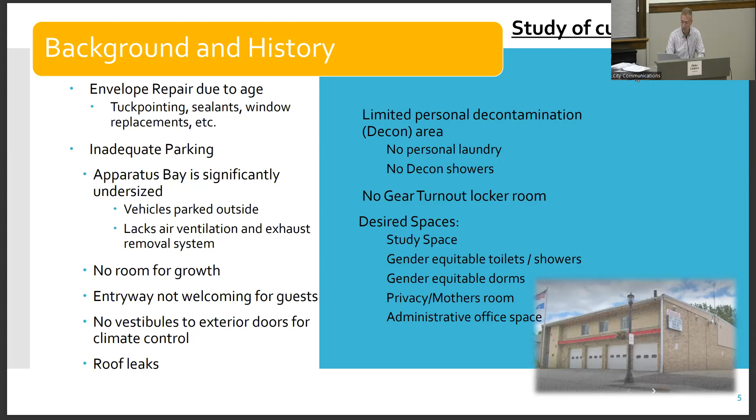We also identified that we would like to see different spaces, like a study space, gender equitable toilets and showers, gender equitable dorms, privacy mother rooms, as well as administrative spaces. In that study, we also identified some non-compliance issues, like ADA compliance.

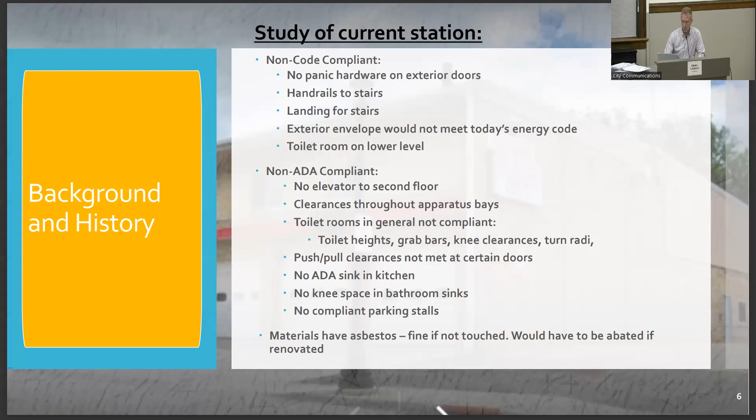We also identified that we do have asbestos. In the places that it's at, it's fine if we don't touch it. But if we do any renovations or maneuvering around it, we have to have an abatement plan in place.

So overall, what we assessed on our 60-year-old station is that the positives are that it was in a good location compared to our fire district and where our responses and volunteers were. It has a meeting room, which is nice, as well as museum space.

The negatives came to light with safety, lacking modern safety features and space for best practice. The apparatus floor is small, along with cleaning and decon, office space, turnout gear, public entrance and parking, as well as overnight accommodations. Overall, the study led to a recommendation to begin assessing a possible new facility.

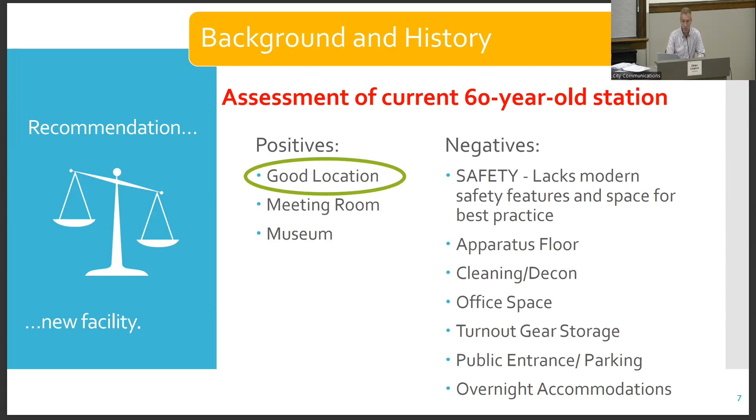As we talked about with the location, the study also showed us a mapping of where our volunteer responders are in relationship to the station. You'll see little orange dots on there that indicate where the home residences are of our volunteers responding to calls.

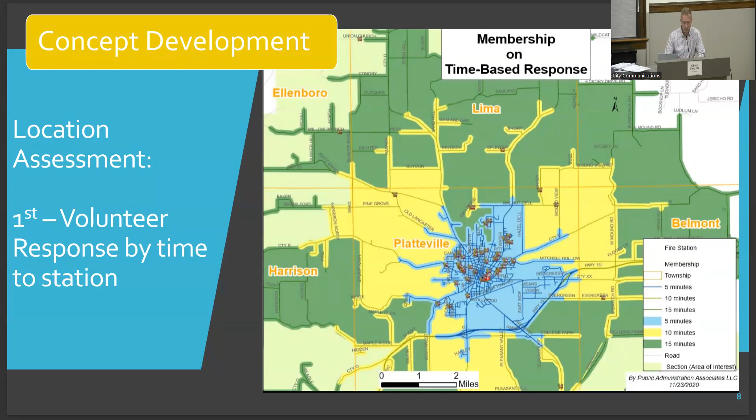Everything in the blue section is about a 5-minute response. Out into the yellow sections, you're at a 10 minute response. And out into the green is a 15-minute response for our volunteers reporting into the station.

A study was also done on the mileage out from the station at its current location. The green is a 1.5 mile response out, and the pink is a 5 mile response out, and everything beyond that is beyond a 5 mile road distance.

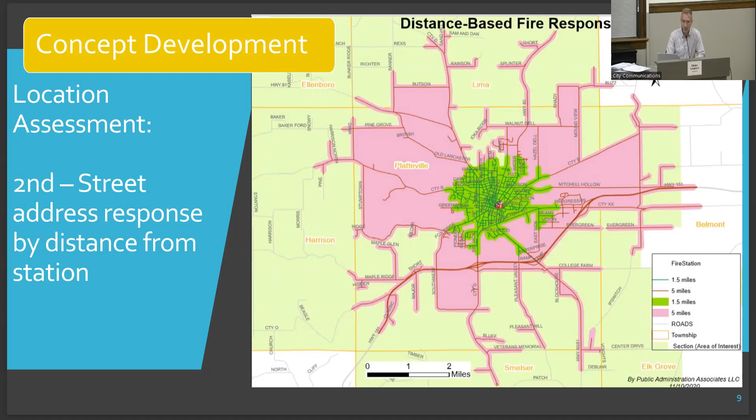Later into the project, we also started asking the question, as we considered placement of the fire station, where are our responses at? A recent plot graph was put together through our partners, the Southwest Regional Planning Commission, who does our GIS work. The Chief sent them the addresses of our responses in 2022 to put on an overlay map.

This is kind of an expanded area, probably beyond our fire district itself, capturing mutual aid responses. You'll see all the little black dots there show where our firefighters reported to calls, not necessarily fires, but responses.

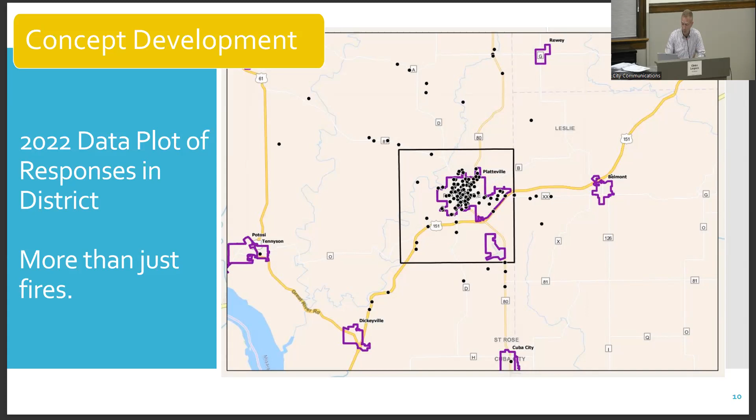The next map narrows in onto the city center, mapping where a majority of the responses were. This map gets very tiny, but the legend in the bottom right shows the different types of responses with color-coordinated circles. Fire is yellow and gas leak is green, but it's all very tiny because some responses were all condensed in a very tight spot.

The GIS map overlay work also put cigarette burns to show the volume and concentration of responses. You'll see some spots flared out to yellow, indicating a volume or concentration, not like a massive fire that happened on the east end of town. It's just showing the concentration of our spots, correlating with where people are at in the district.

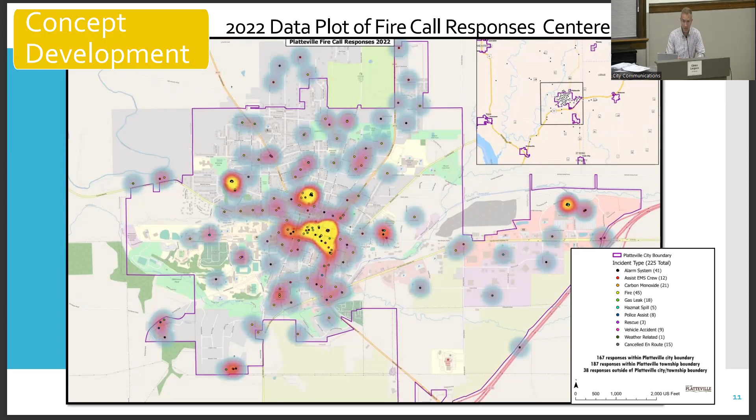With all this data and the availability of space that the city had at the time of the study, we evaluated three main areas. We evaluated the existing site on East Main and quickly arrived at the conclusion that it's too small. The 6 bays needed for the current apparatuses does not fit on the existing parcel.

We then looked at the Armory facility on Water Street, and again it arrived at this being too small as well.

It would need a 3-story solution, and it has challenges with parking as well as stormwater that runs through that area. And then concerns with site safety and where responder parking would have to be in relationship to where the bays and other elements are.

And then the space between Adams and Lewis Street, the O.E. Gray school site, was also evaluated. This kind of proved to be the most opportunity out of those 3 sites. It has room for growth, but it was also identified as having to account for some slope in that area as the contour runs downhill from the front side of Adams to the north side of Lewis.

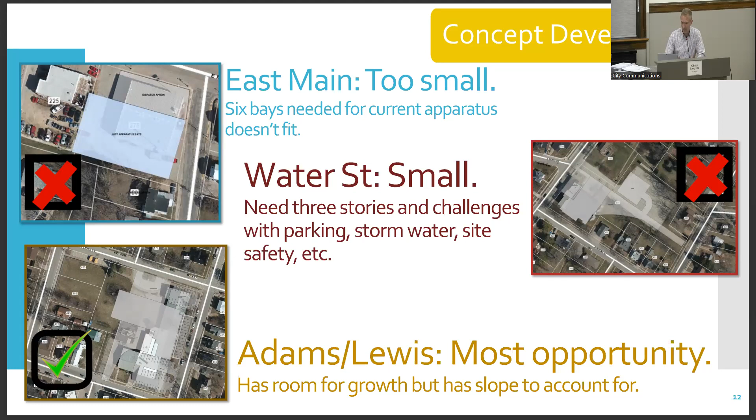With this kind of an assessment and this data coming back, the city decided to move forward and begin design, and we brought in Wendel Five Bugles to kick off a project and follow a timeline that roughly followed this, getting extended a little bit. The end of that kind of pushed into, I believe, like April-ish of 2023, but in hitting these benchmarks.

While we were evaluating the different opportunities on the O.E. Gray, one of the first opportunities evaluated was a renovation of the existing school there. So the concept was brought forward of, can we reconfigure that, put a bay on it, and make it a fire station? Through that exercise, we realized that the school is in fact not meant to be an emergency response building. There was a lot of space, but the space wasn't necessarily in the right spots. Using the hallway configurations existing there also proved a challenge for operational purposes. And so the overall assessment is that it would require significant demolition and reconstruction, and kind of having an etch-a-sketch on O.E. Gray was seen as most preferable.

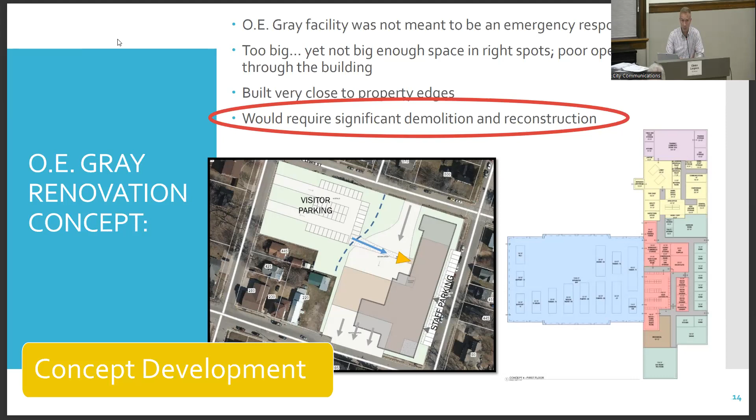Then a series of multiple different models were explored with a 2-story type of a design concept. They looked initially at trying to capture some of the topography, having a ground level entrance off of a basement floor and a ground level entrance off of Adams Street, and looked at different places to position it on the parcel. There were multiple models explored in trying to arrive at a solution on O.E. Gray.

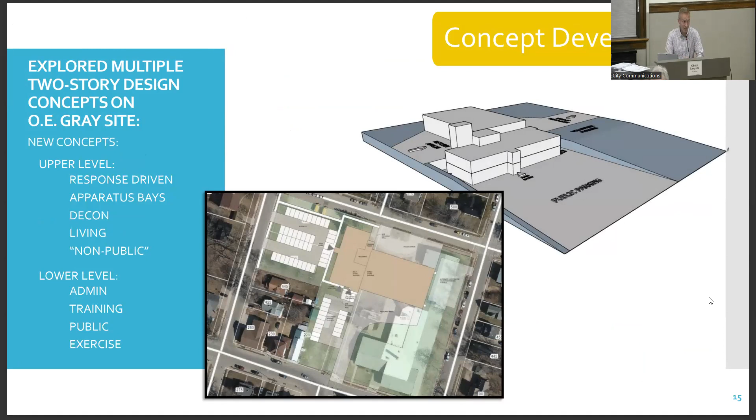At the same time, through the efforts of some amazing folks here at the city and with support from our state and federal legislators and all kinds of folks that helped us with this, as well as partners in town writing letters of support, we were given notification of an appropriation of federal congressionally directed funds of $7 million.

And then we also brought in a construction manager, arriving through a bid process through our RFP process, arriving at Kraemer Brothers. In bringing in the construction manager, we had a little bit clearer vision of what some of the civil work was going to be in order to accomplish the project. So we had a clearer understanding of the engineer, as well as some of the material costs and inflations.

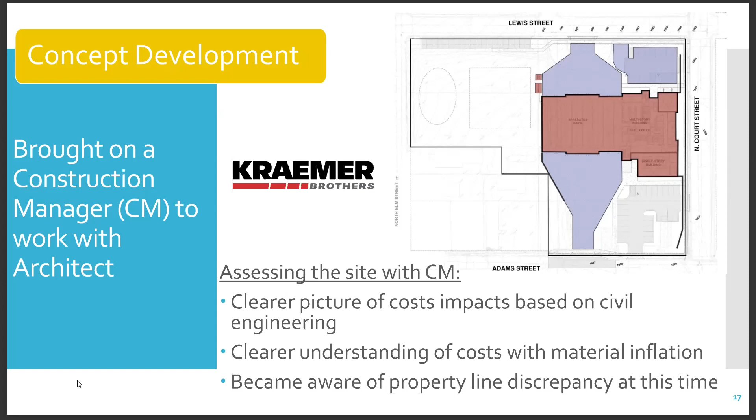And then at this time, we also became aware of a property line discrepancy as we surveyed the plot. How that impacted was, if you're familiar with the driveway that goes into O.E. Gray, the fence on that driveway on the west side is edged over and actually encroaches into the existing parcel, because the original alleyway is only on the east side of what is Highway 81 there. So we became aware of that small change in expectations, if you will.

As many of you were here on the evening of April 20th, we had our schematic design presentation, or our concept design presentation, brought forward from Wendel Five Bugles and then also the Kraemer Brothers. The solution fit on the build site. It offered 7 drive-through bays, decontamination, admin offices, a 60-person training room, storage, kitchen, EOC space, and future expansion for dormitories, essentially a second floor that was shelled.

It came at a cost of what was estimated at $15,467,000 based on square footage. And it also had several different features or alternate bids that could be included into it or reduced from it.

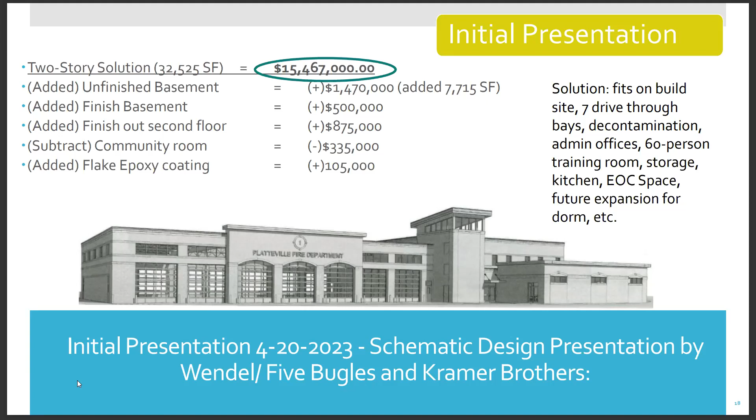In taking that design and talking with our folks here on the city end, we asked them to slim down that 2-story schematic to get to a price point down about $3 million, bringing it from a 15.4 down to a 12.5.

That was based on the assumption of knowing that we had $7 million in appropriations. That put an obligation on the city of borrowing approximately $3 million. It put our town's partners in an obligation of borrowing approximately $1 million. And then that also left about 1.5 million that, in dealing with our fundraising partners, they felt they could potentially raise that much in funds here with local support.

In our efforts of doing that, how this was all slimmed down was really based on square footage reductions to fit a price point. So all the different features and functions of those rooms, the gear room, the PPE lockers, watch room, et cetera, was all condensed down again to meet a price point.

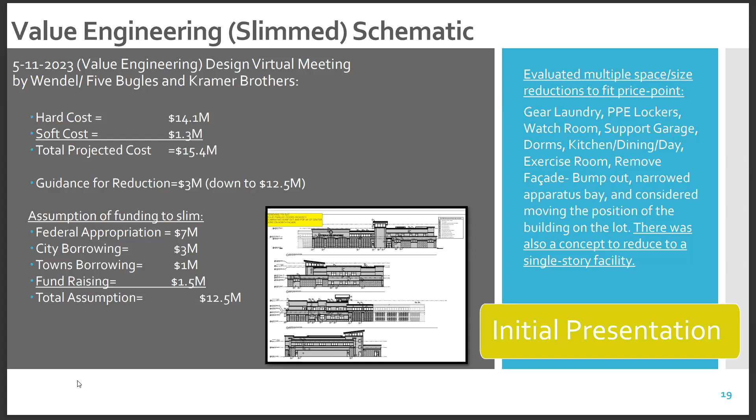There's concerns on how much functionality we're going to be losing if we compress those spaces that small. At this time it was also brought up, is there a way to reduce additional costs, try to save some of those features and the size of those rooms by bringing it down into one story? So not quite a backup and restart, but more of a set of, okay, let's try to figure this out.

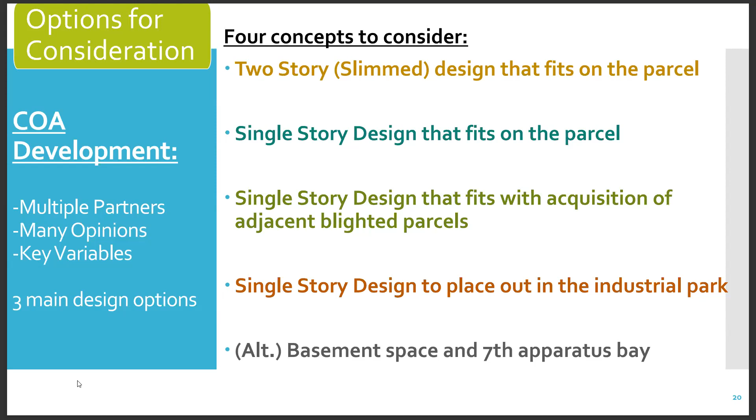So in very broad strokes now, you're looking at the first option. This is the first option of considerations that yourselves and your partners are going to have to decide on: the 2-story slim design that fits on the parcels.

On a broad assessment of this parcel, you're looking at improvement of bay space in comparison to the existing facilities. It fits on the OE Gray site. There's an egress out onto Adams Street. It's east of the corner on Highway 81.

It doesn't allow for future occupancy without added money, because this design and the price point essentially has the 2nd floor shelled and unfinished. So we don't have dormitories for overnight or long stays, or facilitating full-time responders. The multiple story also includes the need for an elevator and stairwell costs to be in compliance with a public building, and the spaces have been slimmed to meet a cost point.

Again, the functionality impacts probably have been underappreciated in terms of what those rooms are going to look like being compressed. We're also potentially having some storage room impacts because it is getting slimmed down. And again, the 2nd floor is not built out.

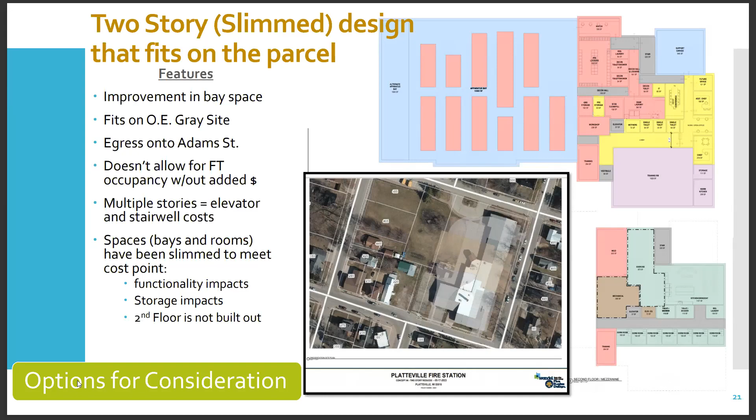So putting this in a realm of kind of teeing up for a matrix decision, the overall space of this design is at 26.5 thousand square feet, reaching about 83.2% of the assessed need of 31,900 that we had at the onset of this study.

The response to this facility is optimal, as it's still located in the center of our volunteer response, in the center of where we're seeing most of our fire district responses. Egress is onto Adams Street. The growth opportunity is limited, but there's some opportunity for growth with consideration for the slopes and the initial placement of where it goes onto that parcel.

So overall, the pros are it fits on the parcel, it has improved circulation over the existing facility for movement throughout the building, and good separation between public and private space that allows for public parking and entry off of Adams Street. There's multiple levels, requiring an elevator and stairs, which is seen as a con because that's going to incur more costs.

We have some lost storage space in consideration for our existing building, and again the reduced rooms have potential for some significant impacts on functions. And the 2nd floor with this price point is not built out.

So the cost, the base bid on this is $12,482,145. And again, this is 12 million — I'm sorry, 12 million, yes, 12 million.

Thank you. It's made out of more than cardboard. So yes.

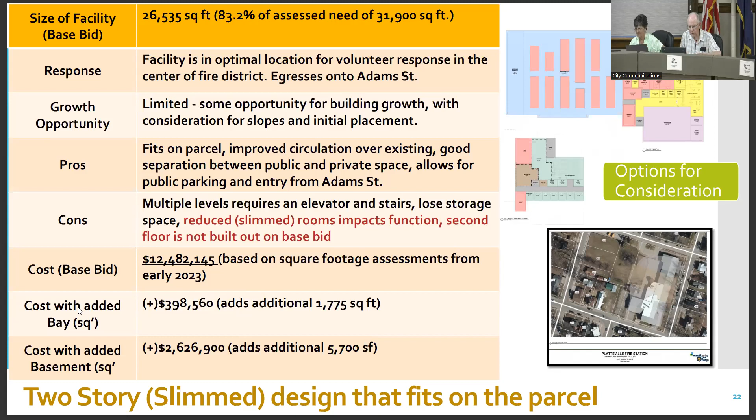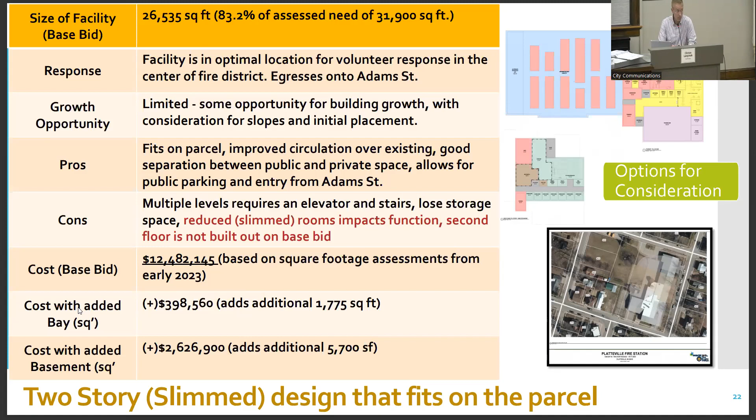So there are 4 concepts. We've just heard concept number 1, the 2-story. Now we're going to go to concept number 2, which is a single story design that fits on the parcel. Again, this fits on the parcel. Some of the features, broadly - advance your slide, please. Thank you, okay, there we go.

But again, if this is a single story, is there also a basement, or are you not talking about that? No, that's an added feature that can be in addition to all 4 of these options tonight. You can put a basement under it. It costs about $2.5 million.

So you're going single story, 1, 2, 3, and you can put a basement underneath, so that's another floor. Yes, essentially a basement would be an underground, lower level, extra floor. Correct. It's not included in any of the base bids, it's an alternate on all of them. Okay, I just want to be clear what you're talking about.

So in broad strokes, the features of this one: it fits on the parcel, it has egress out of the bays onto Adams Street like the previous option, and it allows for future full-time occupancy. In pulling the second floor down, it was thought that it would add cost, but let's see what it looks like to build out those dormitories to allow for potential full-time responder occupancy. The thing is, with the single story design, it has no elevator.

So that is a reduction in costs. But you can see that this one snugs up very much against Court Street, and there is no off-street public parking. We do have some off-street responder parking coming off of Lewis Street in the concept design right now, but there is no public parking. It would have to be along Court, Adams, and adjoining streets.

Putting this on a matrix, this one's a little bit bigger now. You're at 29,164 square feet, which gets you to approximately 91.4% of the assessed need. The facility is an optimal location for volunteer responses in the center of the fire district. Egress is onto Adams Street. Growth opportunity is limited - growth may likely be an outbuilding or modification to responder parking with consideration for the slope.

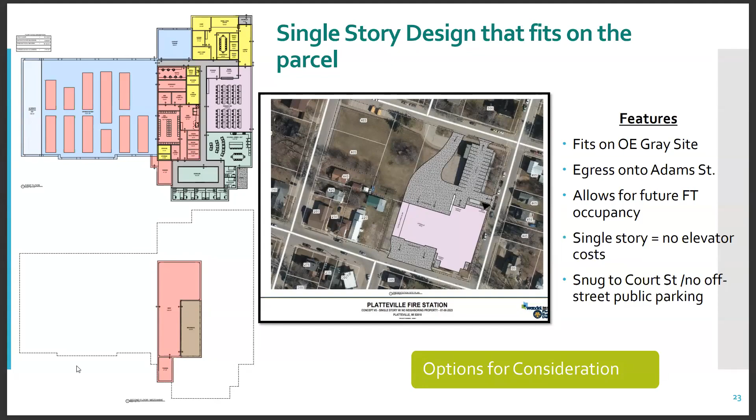I think it's important to point out that, in order to reduce costs on civil engineering work, the building is brought up to the south side of this parcel where there's less slope. If we went back and tried different angled driveways, it would result in more retention walls and things of that nature. So in trying to reduce cost, it's edged up on the south side of the parcel. The pro is that it does fit on the parcel.

The admin is connected to the garage and the watch room, which is seen as a bonus. It does not require an elevator or added stairs in comparison to the previous option. The cons are that the public parking and entry is less than optimal - you're again not going to have off-street parking. The seventh apparatus bay may not fit in this option because the parcel lines on the east with adjacent properties are very, very snug. Once civil engineering is actually done, rather than just dropping a concept picture on there, and it's actually surveyed and scoped out, it may not fit that seventh bay.

The cost of this one comes at $13,391,071. The added bay is the same cost based on the square footage, as well as the basement.

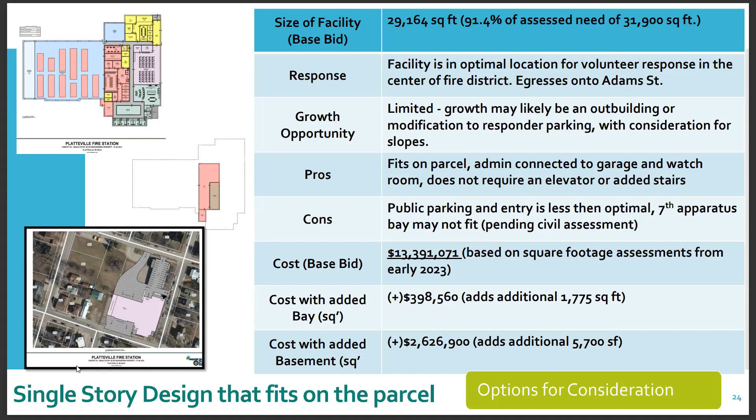There would be egress sliding into the west, so egress out of those bays would be visualized as coming out right onto Highway 81, which is seen as a safety and response improvement compared to the previous two. You'll have more visibility of responders coming out in trucks. It allows for future full-time occupancy, since this price point is built with the dormitories built out.

The growth opportunity is limited. Growth may likely be an outbuilding or modification to a responder parking lot, with consideration for slopes. The pros are safer egress and visibility on Highway 81 compared to the previous two, anticipated space for a seventh bay pending civil work, and room for off-street parking. Like the previous design, the admin is connected to the watchroom and support garage. There's additional storage space, living quarters built out, and the best operational flow compared to the previous one story.

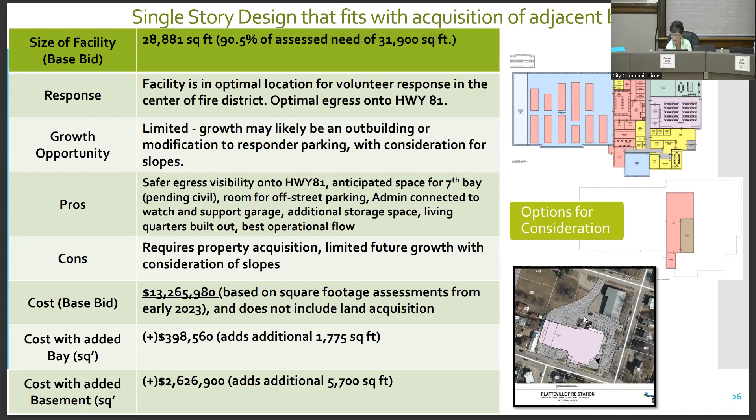The light green, kind of a faded color at the far left, that's the potential seventh bay, yes, on the top schematic there. It's showing your apparatus bay with the fire trucks in there, and the rectangle on the far left is the seventh bay added.

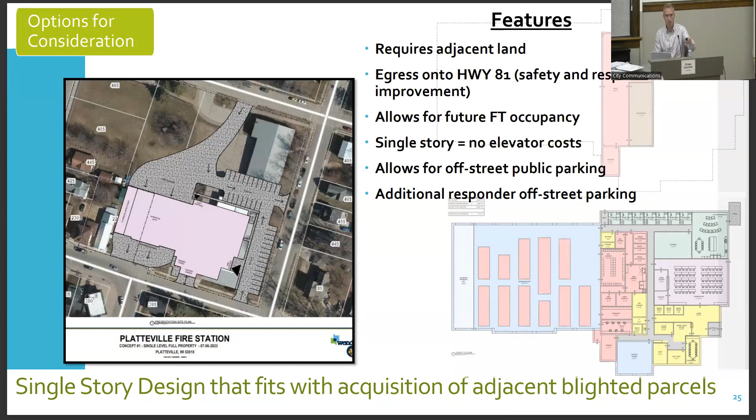That is correct. Question for Chief Simmons: how essential is the seventh bay? Because I know some of these might not be able to happen. Six bays is basically space for everything in our apparatus now, with more space in between them, not necessarily loaded by operational functionality, but again, to organize them to fit into those spaces.

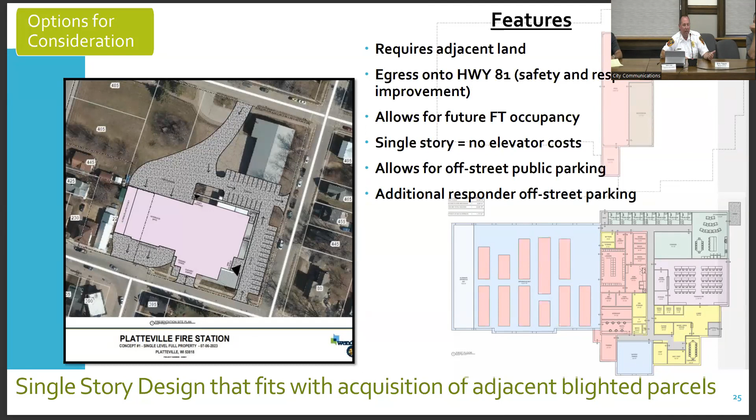The seventh bay allows a space where we can have apparatus if it's being serviced, because they are stacked. If we're working on one and can't get the one out behind it, it becomes a problem. So it allows us to have a space to either service one or adjust the operational flow so that we don't have to move an apparatus to get the one out behind it that we need. Just because they're pull-through doesn't necessarily mean that with six bays, we can fully stack everything the way it needs to operationally respond.

So it allows you for all that future expansion. And at $400,000, you'll never build that space for $400,000 again. That space becomes more and more expensive and maybe not possible in the future. Sounds pretty essential. Yeah. Thanks.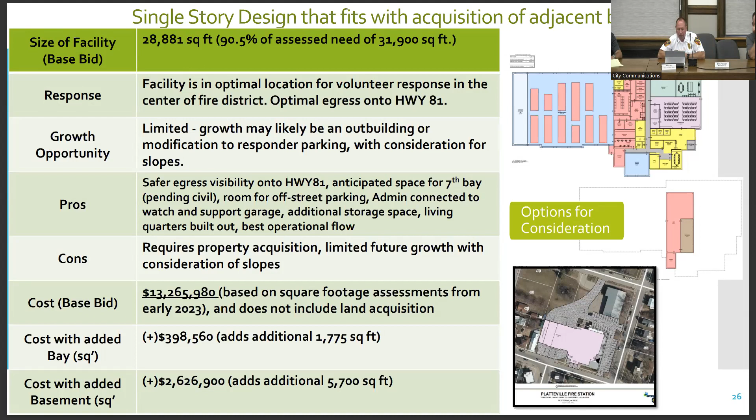The main difference then is, of course, you retain the same single story design, so there's no elevator cost. Out in the industrial park, though, you're going to have certainly more space to grow if the building has to expand east, north, or south, depending on how far from the road it is, you're going to have optimal space. The downside, most obviously, becomes the longer response distance and time for responders.

Both volunteers coming to the facility and, following the data we have, responding back out to calls. The other downside to consider is that it will utilize development district space. We are trying to promote growth out there, and that is less taxable space available.

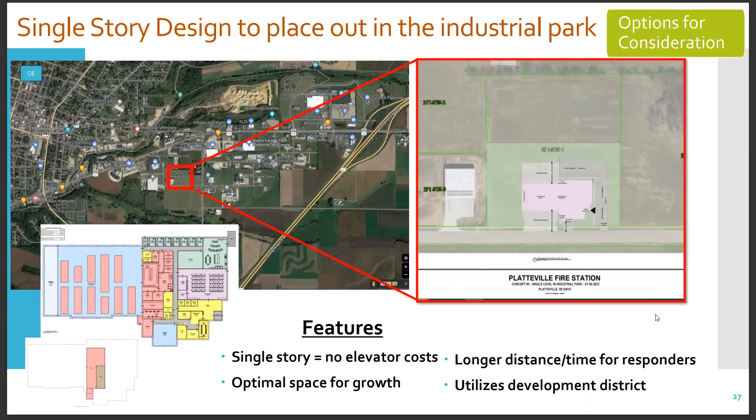The parcel will need less civil work, including no need for demolition on OE Gray. It has the same features of connecting the watch room to the support garage as well as additional storage. The cons, as we talked about, are the response time. It does take space from economic development, and it could have potential impacts on the ISO rating as well as FEMA grants. But the overall cost is coming in significantly lower with the idea of less civil work.

$19,592,475. 12 million, what did I say? 19. How did I get 19 out of that? It's a good thing you guys are here. $19,592,475 - did you just say 19? He did, did I say it again? You did. It'll come in at a little over 12.5. You don't like that option. I think you need some water or something. Oh sorry, too many numbers today.

12.6, okay. And yes, in talking about the placement too, we've had conversations with chiefs. We've talked with 2 different chiefs that gave anecdotal situations of towns that built in their industrial park expecting growth to go out there, and then finding out that in fact the city grew the other way and they're responding out further from city center to a site and coming back.

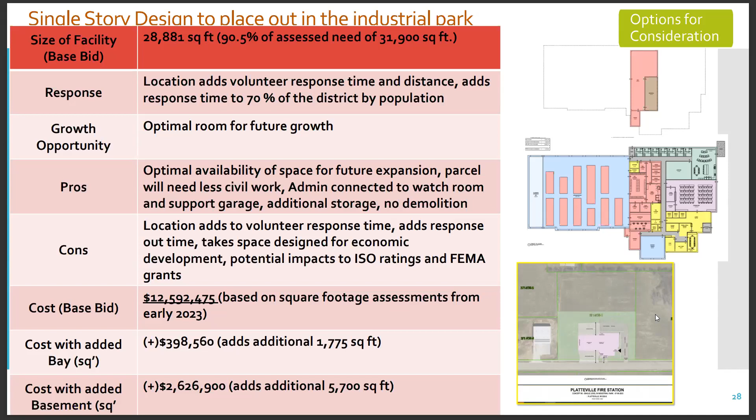Moving past our 4 major features, we talk about the alternate bids, and what would we be gaining from them? A basement space - we have room for future expansion opportunities and storage. We have future partnership opportunities. We have potential for shelter space in the realm of disasters and such.

With the 7th bay added, as Chief mentioned, it's space for future apparatus needs. It allows for more flexibility in apparatus layouts, and that's in regards to responses. I don't know if Chief, if you want to expand on having the different abilities to put different pieces in different places.

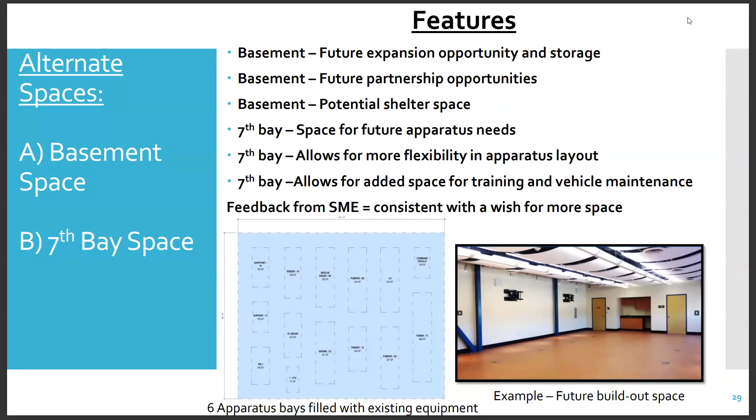Well, with us covering both city and rural areas, we have to use different types of apparatus. Rurally, they don't have hydrants to supply a water source to them, so we use tenders and take the water with us. Then there's other specialty type equipment you might use - UTVs, brush trucks for off-road type fires and stuff like that.

So not everything goes to every type of incident we have. As it is now, we have to move vehicles to get to another vehicle we need to use, because vehicles are basically placed in the current station by how they fit, not by how they should functionally respond. So that's our concern with 6 bays - we've taken our problem and just spread it out, putting more space between the trucks, as we haven't addressed that type of issue.

The graphic, the blue graphic there, shows the 6-bay space with the entire fleet kind of in there, and it does fit. Part of it is, in all fairness, 2 of the smaller vehicles could fit in the support garage instead. So the tinier rectangles could be taken out of that square to get a true assessment of what it would look like.

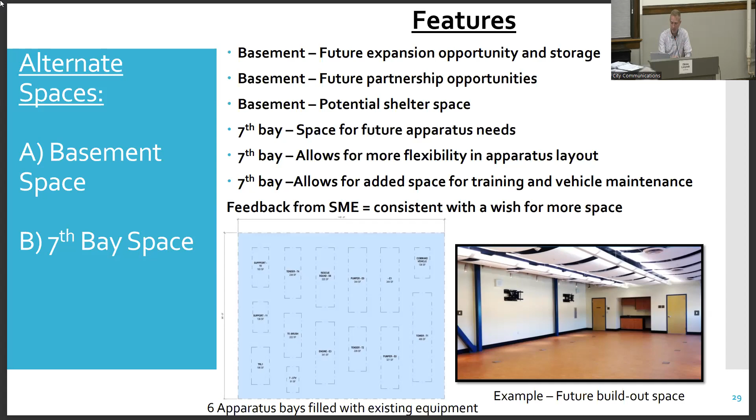So then we took these concepts to a couple different fire chiefs who had recently gone through a build, were considering a build, or recently built, and asked them to give some feedback on what they thought. A lot of the consistent feedback arrived at talking points like: it's maybe not a matter of if you're going to need 24/7 staffing, but probably a matter of when, and whether that happens in a 5-year, 10-year, or 30-year window is yet to be seen.

Very fortunate for the responders that we have right now. Building-wise, it's recommended that you build the facility with the understanding that your responders, for voluntary purposes, are trying to get to their locker as soon as they can at the shortest possible distance. Also, if you can afford an extra bay, try to do it now -- it allows for more training and maintenance.

If you can't get enough storage space, it fills up fast. They also recommended, on a more technical level, when you do have storage space, visualize and plan what that shelving is going to look like for that space and how it's going to operate.

They recommended the current designs all call for an in-floor heating system, and recommended dual doors to keep that heat in place, because opening up both doors blows all the hot air out, and then trying to reheat that space with just forced air becomes a problem. So if you can have the cement underneath warm, it helps heat the space quicker.

They recommended that if you're on the OE Gray site, it would be more optimal to egress onto Highway 81, which would be safer than Adams. They also said: follow the responder data for location, and consider safety -- consider truck egress in relationship to your responder parking was another point we talked about at length.

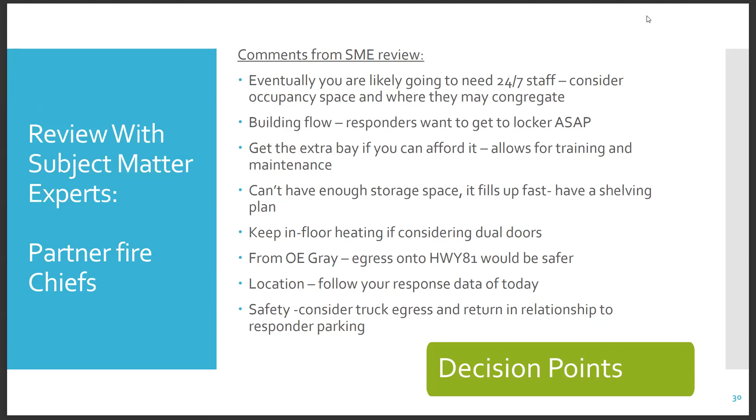We broke it down to try to get a subjective view on public safety and response, assessing what they look like in comparison with each other, as well as from a volunteer safety perspective. Then a best guess or best opinion on growth, availability, and function longevity. And then we have the big hitters on what we thought were the pros and cons of each model design, and the laid out estimated bid costs or base costs with the bays and the basements.

The decision point then on how it impacts our partners from a borrowing sense -- under the premise that we have $7 million coming in appropriations and $1.5 million coming through fundraising, trying to reach a project target of $12.5 million -- puts about $3 million of burden on Platteville and a remaining $1 million on our townships. If we increase that to a $13 million project, then we're at about 3.5 for Platteville, and 1 for the townships. At 13.5, we're at about a $3.8 million borrowing burden for the city.

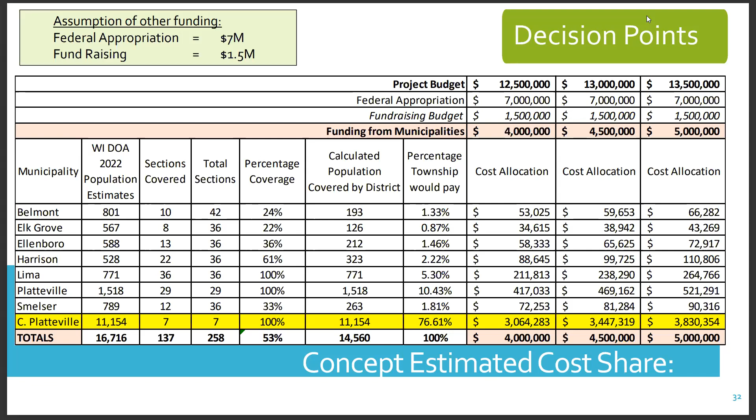But on timeline, if we can continue moving on this, we want to get out to our partners in August and September, get their ideas, and bring their ideas back to you with a recommendation in September. We'd approve a concept design, hopefully in September, then reach a schematic design phase of about two months, with partner presentations at the end of the schematic design -- there could be multiple touch points involved with that.

If we arrive at a schematic, we get into design development of approximately another two months. All things working out, we'll then set our GMP -- guaranteed maximum price -- with our contractor, and finalize financing hopefully around May or prior to. Construction documents then go out for two months, followed by a release for bidding in summer or fall of 2024. If all things continue on that track, we have construction start in fall of 2024.